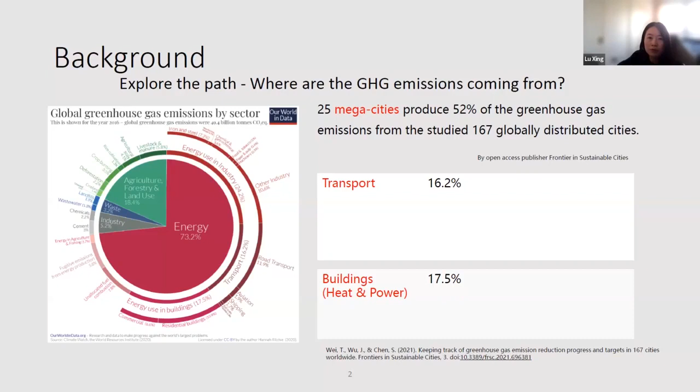If we look at the figure on the left, which shows the global greenhouse gas emission by sector, we can see that energy takes about 73.2% of the total emissions. And on the right side, we can see that building heating and power takes about 17.5% of the whole gas emissions.

So the question is, why do we need hydrogen? Hydrogen has the highest energy content by weight of any chemical fuel, 3 times higher than gasoline. It is a critical feedstock for the chemical industry, including oil refining and fertilizer production. It also powers the fuel cell with little or no emissions.

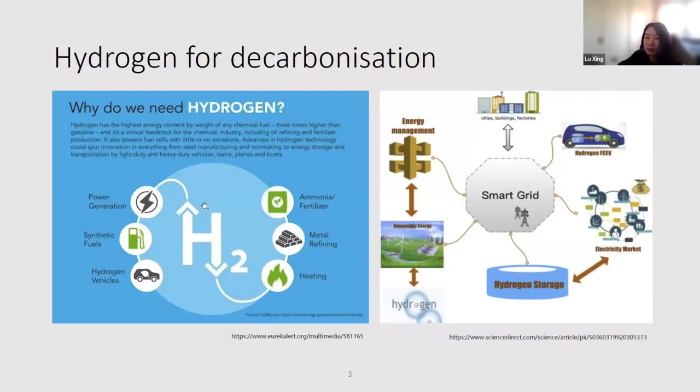So when we mention hydrogen for decarbonization, especially the decarbonization of building heating and cooling, actually there are different types of hydrogen. Currently, more than 90% of the hydrogen is produced from fossil fuel by steam reforming of natural gas and coal gasification. Based on the carbon emission, we have gray hydrogen, blue hydrogen, and green hydrogen. Green hydrogen production is powered by renewable energy sources like solar power or wind power through water electrolysis to split the water into hydrogen and oxygen.

There are different types of electrolyzers, as you can see in the figure on the right side. In this research project, we investigate the PEM electrolyzer, which has the ability to operate at high current densities. This can result in reduced operational cost, especially for systems coupled with very dynamic energy resources like wind and solar. So we can see on the right side the PEM electrolysis cell, and how the cell can use solar power to split the water into hydrogen and oxygen.

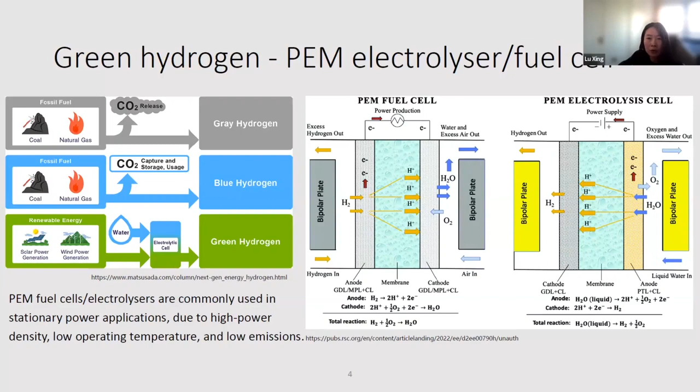And also in the figure we have the PEM fuel cell, which is able to utilize hydrogen and oxygen as input and transform the chemical energy liberated during the electrochemical reaction to electrical energy. And we can use that electric energy for building applications. PEM fuel cells are commonly used in stationary power applications due to high power density, low operating temperature, and low emissions. So we just introduced some background of the research.

Now we discuss the motivation of this research project. In the UK and European countries, electrification of heating and cooling provisions, where a heat pump, electric heater, or electric boiler is used, provides a pathway for carbon emission reduction.

Therefore, we propose developing a building distributed multi-energy system integrated with hydrogen to decarbonize the electricity generation for the building, heating, cooling, and lighting. Specifically, we want to explore mainly two aspects in this research project. First is hydrogen as an energy storage method for decarbonization in the building sector. Second one is the application of the concept of circular economy.

To decarbonize, green hydrogen seems to be a promising solution. While in this process, there will be a large amount of water usage, wasted energy, and material. With the proposed system, which has an integration of the PEM electrolyzer and fuel cell, the water used by the PEM electrolyzer can be circulated to the PEM fuel cell to ensure the water, hydrogen, oxygen recirculation in the system.

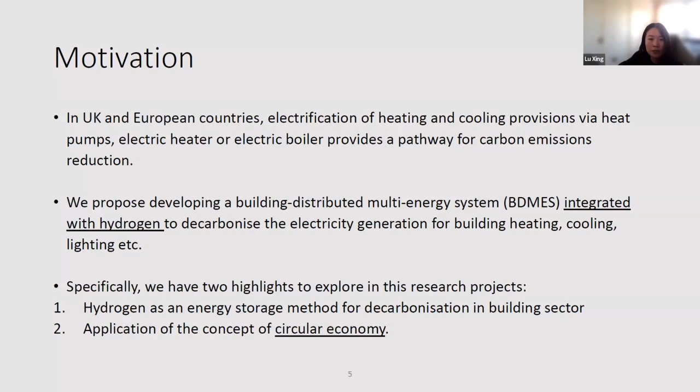Originally, we wanted to explore both the energy and material circulation because in the system, we have a large amount of heat generated by the operation of the electrolyzer and fuel cell. However, due to the constraint of time, because this is only a 6-month project, finally with the team, we decided to continue those as the team's future collaborative work.

Compared to battery energy storage, which is a short-term energy storage for hours, hydrogen energy storage can make it possible to compensate for longer-term fluctuation, even though higher losses occur due to lower efficiency. To our knowledge, this research is the first kind of analysis related to the modeling and investigation of both hydrogen electrolyzer and fuel cell integration into the distributed multi-energy system for the building application.

In previous or existing research work, we already see projects investigating the hydrogen fuel cell for meeting building energy demands. However, in this project, we are proposing the integration of the electrolyzer and fuel cell for the building application. So the question is, when we only have the fuel cell for providing the building energy demands, where is that hydrogen coming from? Is it blue hydrogen, gray hydrogen, or green hydrogen?

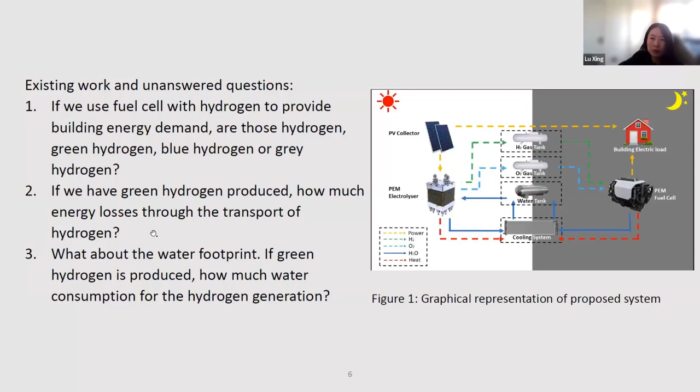By proposing an integration of the PEM electrolyzer and fuel cell into the building energy system, there are several benefits we can possibly gain. The green hydrogen is produced and consumed locally at the building sites, which eliminates the high cost and energy requirement for hydrogen transportation. Also, this system suggests the possibility of energy autonomy, which is a very essential concern due to the current energy, climate, or war crisis.

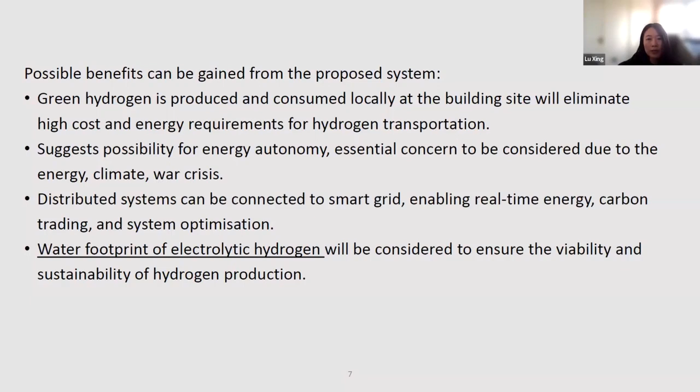Then the distributed system can be connected to the smart grid, which enables real-time energy and carbon trading and system optimization. Finally, putting the PEM electrolyzer and fuel cell together, the fuel cell generates water, which can be consumed by the electrolyzer. In that way, the water footprint of the electrolytic hydrogen will be considered to ensure the viability and sustainability of hydrogen production. By investigating those aspects, this study aims to provide valuable insights into the potential of hydrogen integration in building applications and inform decision-making for a sustainable energy transition.

The research objectives are as follows. This research aims to comprehend the interaction mechanism between the PV module, the water electrolyzer, and fuel cell. A comprehensive assessment from a holistic, technical, economic, and environmental integrated perspective is investigated for evaluating the system's feasibility. We mainly have two objectives: developing a model for the hydrogen integrated building distributed multi-energy system that produces and consumes hydrogen locally at the building sites, simulating and analyzing the dynamic system response, and evaluating system performance characteristics for the building application.

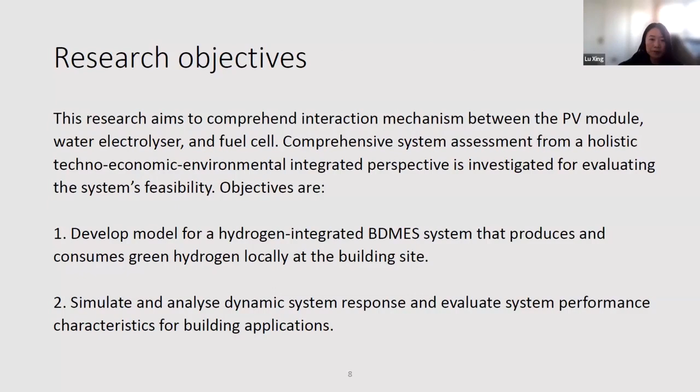The whole system has the electrolyzer powered by the solar cell, and the fuel cell generates power with the hydrogen produced. Design and simulation of the proposed system for investigating green hydrogen in the building application. We aim to achieve a cycle of water, oxygen, and hydrogen in an electrolytic cell and fuel cell system under the following assumptions.

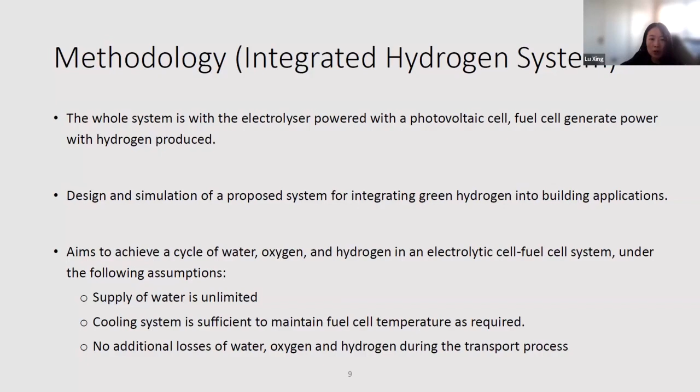So we assume that the supply of the water is unlimited. The cooling system is sufficient to maintain the fuel cell and electrolyzer at the required condition. No additional loss of the water, oxygen, or hydrogen during the transport process.

So here in this slide, figure 2 presents the schematic diagram of the proposed system. So in this figure, we have a solar PV, electrolyzer, fuel cell. So this is the electrolyzer, fuel cell, solar PV, and the building loads are used as the input. And also we have a cooling system to maintain the system condition.

So we start from here, which is the exiting water coming out of the fuel cell stack at a temperature of 80 degrees Celsius. Going through the cooling system it will be cooled down to 20 degrees Celsius, and this will be pumped through the ion exchange resin cartridge to deionize the water and then enter the stack of the electrolyzer. On the other hand, the solar panel will provide the power for this electrolysis process.

So the exiting stream on the anode side is water and oxygen. The water will be recycled after it passes through the anodic water gas separator. So the oxygen will go through a drying and purification process, and later will enter the cathodic water gas separator and another humidifier before it enters the fuel cell stack.

On the other hand, the hydrogen coming out of the electrolyzer stack will go through a cathodic water gas separator and go through a drying process, and finally will recirculate as an input to the fuel cell stack. With the oxygen, the fuel cell will convert that energy into the power supply to meet the building energy demands.

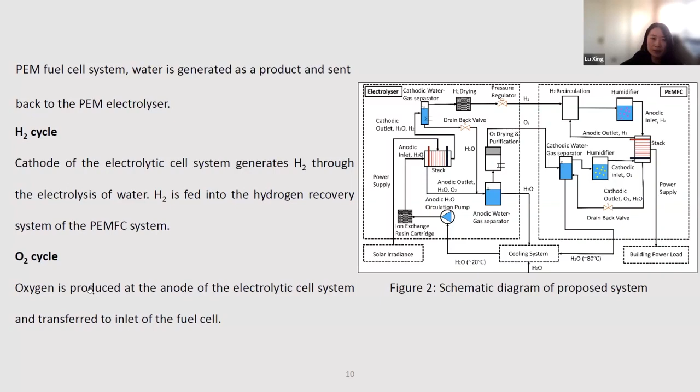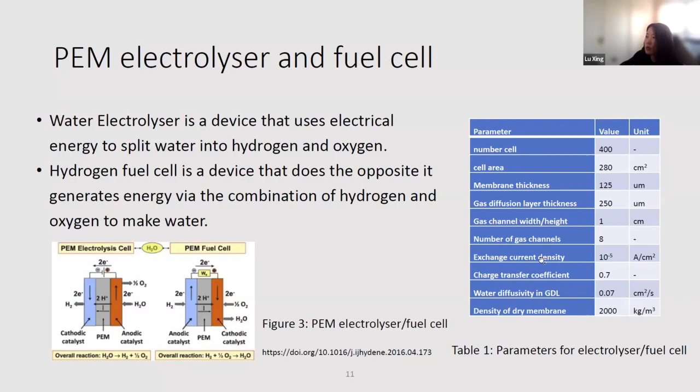So this page presents more details of the PEM electrolyzer and fuel cell. As shown in figure 3, what we have explained before about the water electrolyzer and the fuel cell, we are connecting both of them together. And table 1 here gives the parameters for the electrolyzer and fuel cell that we have selected for the simulation purpose.

So the data for the solar irradiance and the solar PV model are presented in more detail in the report. We selected the data from the London data store for several sites, 20 substations. The simulations were performed to analyze the seasonal variation. And the parameters of the solar panel have been summarized in table 2. 350 watts is selected as the average power based on the data we got for commercialized solar panel power output.

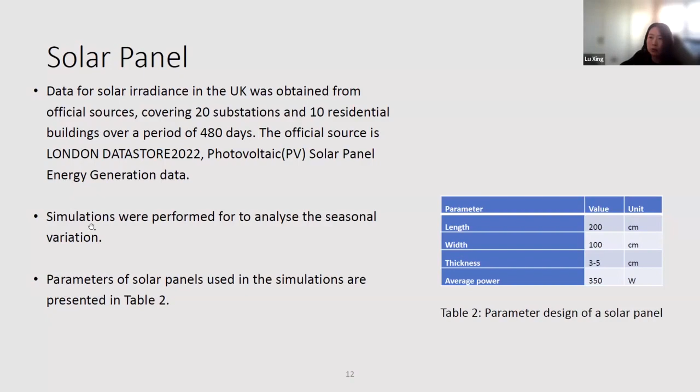So in the methodology part, another important input to the model will be the building energy demands. So the buildings are designed in SketchUp and then in the OpenStudio plugin with the EnergyPlus software. So the residential house is drawn as shown in figure 4. We developed building models for a 2-story residential house.

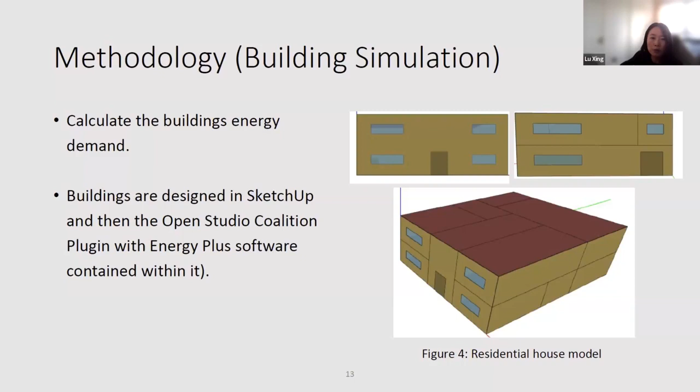We developed models for an office building and apartment to see how different types of building affect the system design and feasibility study results. We also performed a sensitivity study and verified the building loads for different types of buildings. So the case study for the residential building has about 150 square meters roof area and total floor area of 450 square meters. We kept the room condition at 18 degrees Celsius in heating and 23 degrees Celsius in cooling.

Figures 5 and 6 represent the building heating, cooling, and electricity demands for the summer and winter days, respectively, for the residential house in Aberdeen, UK. So figure 5 shows the hourly electrical consumption during a summer day, July 1st, which we selected for the house model. The x-axis is the hours of the day, and the y-axis is the energy demand. So we can see that the highest consumption occurs at around 6 p.m. with a value of 2.2 kilowatt hours. There's no cooling or heating requirement for the house located in Aberdeen during that day.

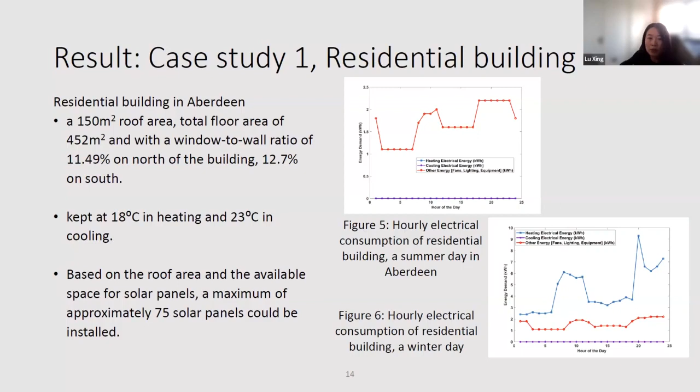Figure 6 shows the electrical consumption of the winter day, which is December 12th, of the house model. So the highest consumption is observed at 8 p.m. with a value of 11.4 kilowatt hours. The total consumption requirement is highest during the night. So it's quite obvious that on the winter day the electricity consumption is much higher. The total electricity consumption during a summer day is only about 30% of the total electricity consumption during a winter day.

So these are the hydrogen integrated building distributed multi-energy system simulation results for the summer day we have selected. July 1st is the selected date for the case study. So figure 7 shows the solar irradiance and the solar power which we can collect from the PV panel on the day based on the measured solar irradiance data.

And figure 8 presents the electrolyzer's water consumption, hydrogen and oxygen. Their ratio is about 1/0.11 and 0.89. Figure 9 presents the PEM fuel cell's water generation, hydrogen and oxygen consumption. So during this summer day, the fuel cell consumes hydrogen at about 0.02 grams per second at peak consumption. But the maximum hydrogen production is about 0.15 grams per second, far exceeding the maximum consumption. And in fact, it happens before the peak consumption occurs at 7 p.m.

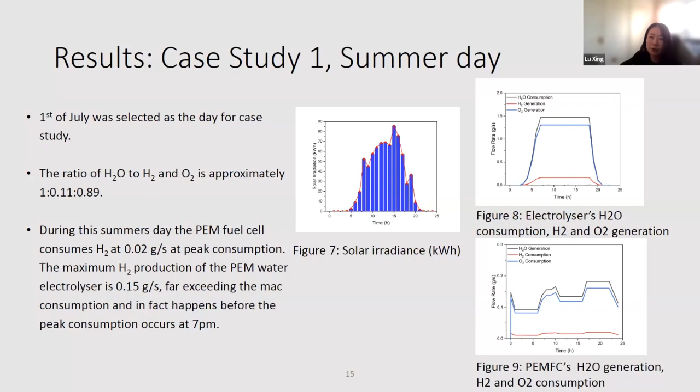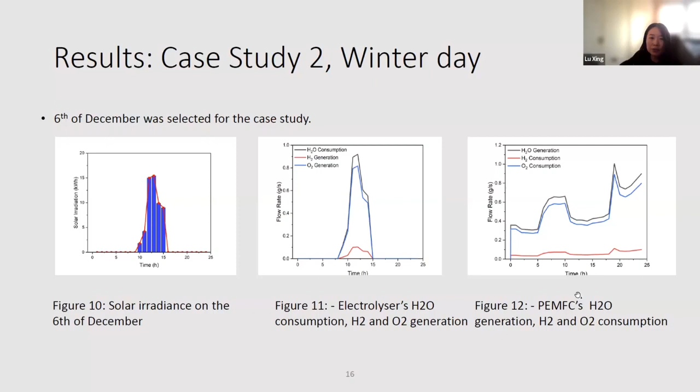So the conclusions for the case study: this study presents a proton exchange membrane water electrolyzer and fuel cell system powered by renewable energy to meet the building energy demands, achieve electricity decarbonization and energy autonomy. The water recirculation of the system has been considered. The case study results for the residential building in Aberdeen, UK have been presented.

The analysis results show that on the summer day, July 1st at 7 p.m., when the daily energy demand is at peak, 11 solar panels are required to meet maximum daily building energy demands and ensure 100% water recirculation. On the winter day, December 6th at 1 p.m., even if all 75 solar panels are operated simultaneously, the system can only meet 26% of the total building energy demands. So these findings provide valuable insights into the potential implementation of electrolyzer and PEM fuel cell in real-life applications.

However, we are aware of the limitations of the work. Because it's only a simulation for one day, we didn't really consider the seasonal changes. Therefore, we have also performed some extended work to assess the system feasibility for an office over a year period. So we chose 18 locations with a variety of different climates, such as humid continental, mild, or hot summer climates across Europe. Our model results show the office block simulation across the UK locations with a range of 100 to 110 kilowatt hours per square meter per year. And we have also verified that against the UK government published report.

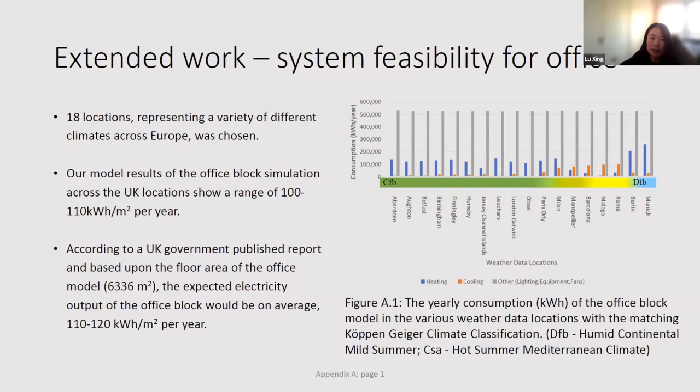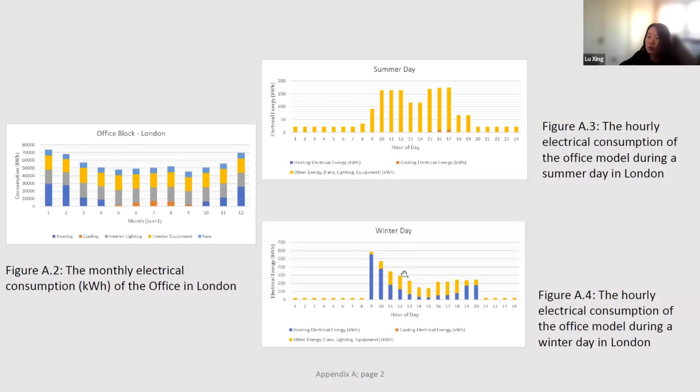So this figure shows the office block energy consumption over the year, and also on 2 typical days. So these are the results we have so far for the extended work for the office building. We are still in the process of processing the data. For example, figure A.5 is the water and hydrogen consumption and production within 8 days. And we also show the water and hydrogen production balance.

On the right side, figure A.6 shows the water and hydrogen consumption and production within 1 year. What's obvious is the water consumption is really correlated with the solar PV power we can collect through the year. And the water production by the fuel cell is highly correlated to the energy demands.

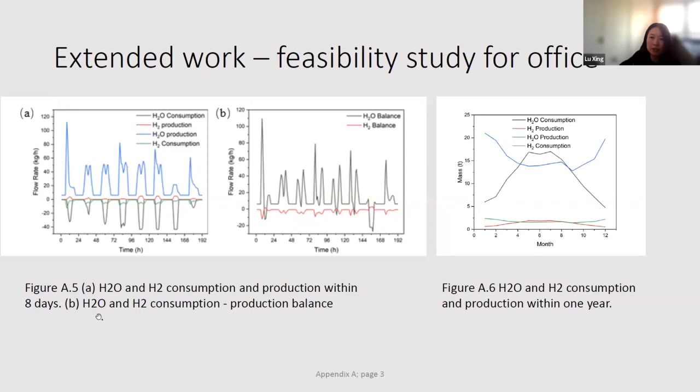So far, the conclusions for the extended work are that using the proposed PEM electrolyzer and fuel cell integrated system for building application, about 71.8% of the energy demands can be met without considering the storage limitation. The energy conversion efficiency of the whole system is about 80%. The production of hydrogen rises in summer when the building energy demand is relatively low. So the peak hydrogen surplus is calculated to be approximately 1,128.3 kilograms.

So finally, for future work, we suggest further validating the model accuracy, and we need infrastructure development to ensure the successful establishment of such a project in practice. Another suggestion is that an improved operational strategy can be investigated, because currently we directly store the energy in hydrogen form. But ideally, we would use the solar PV panels to power the office building directly. If at that moment the building energy is not needed, we can store it in the form of hydrogen. So hydrogen can be used as energy storage and for emergency usage.